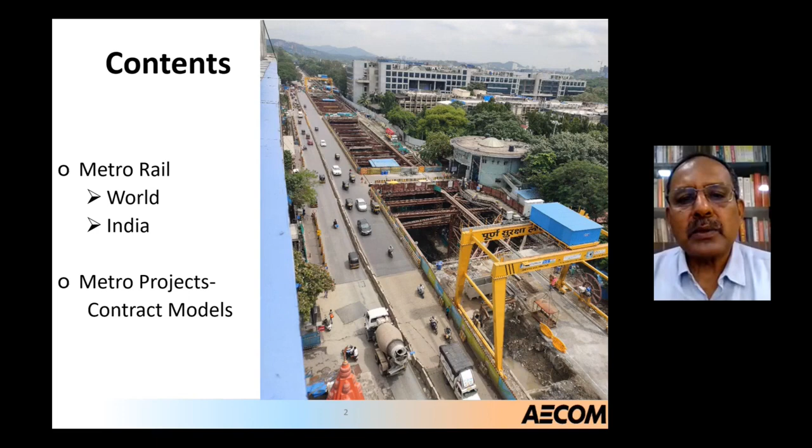So over about 200 cities are enjoying metro rail transport. India joined a bit late, but now it is in full swing. All the tier 1 and tier 2 cities — tier 1 being more than 5 or 6 million population, tier 2 less than that — everywhere it is going on.

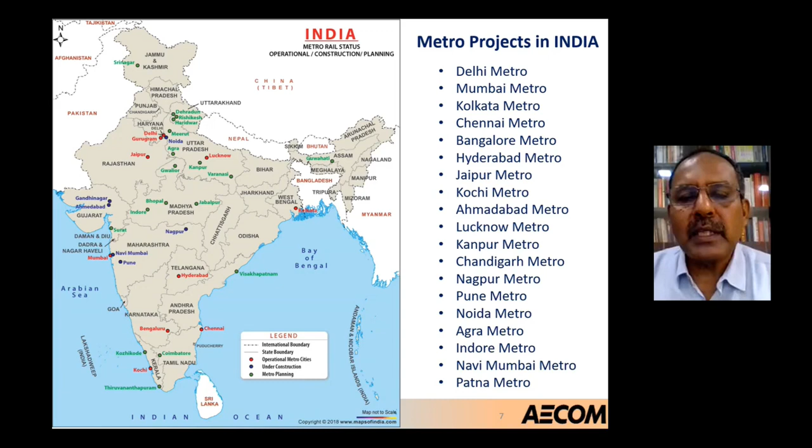Though the construction of metros in India started way back in Calcutta, it only became popular two decades ago when Delhi Metro started. Calcutta, capital of West Bengal, used the conventional cut-and-cover system for the underground metro, both for tunnels and stations, so there were a lot of delays. Delhi started using tunnel technology, TBMs, and so it picked up, and now it is going on in more than 25 cities all over India.

So here is a list. I'm not going to go through every single item, but this is just to give a feel that things are happening in many cities in India now.

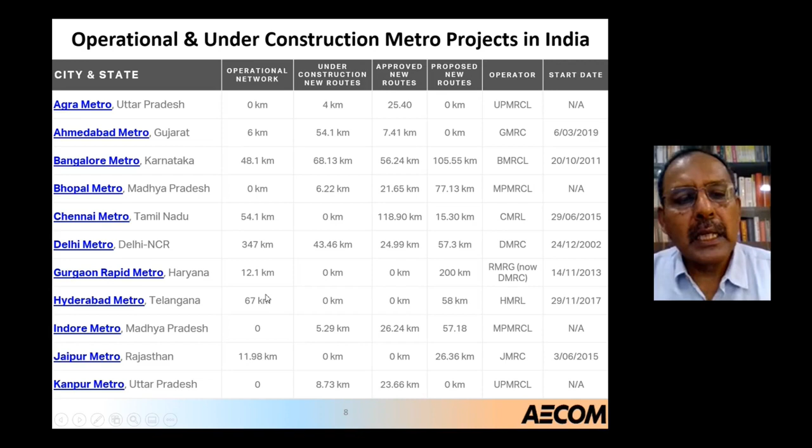So the Delhi Metro, which I was talking about, is now comparable with any other major city in the world. It is more than 347 kilometers of metro, and construction is still going on. I am working for Chennai Metro, the southernmost part of India, and so many other cities. Hyderabad Metro is a unique metro which has run through the PPP model, and other cities are also gearing up.

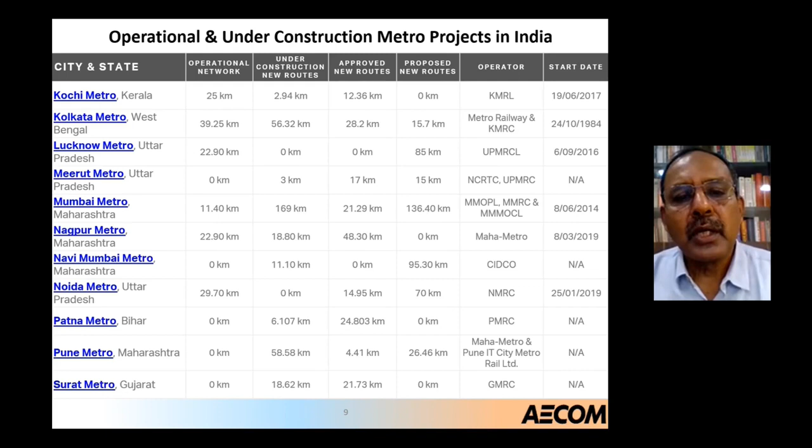So here the list continues. These are either in operation or under construction. The actual length in kilometers which are in operation or under construction are listed here. And these are some of the items which are proposed: Gorakhpur, Kozhikode, Nashik, Trivandrum, and the Metrolite - for people who are not familiar with Metrolite, you might have seen light rail in other parts of the world. It is very similar to that. And a more simplified form, Metro Neo projects, is also there.

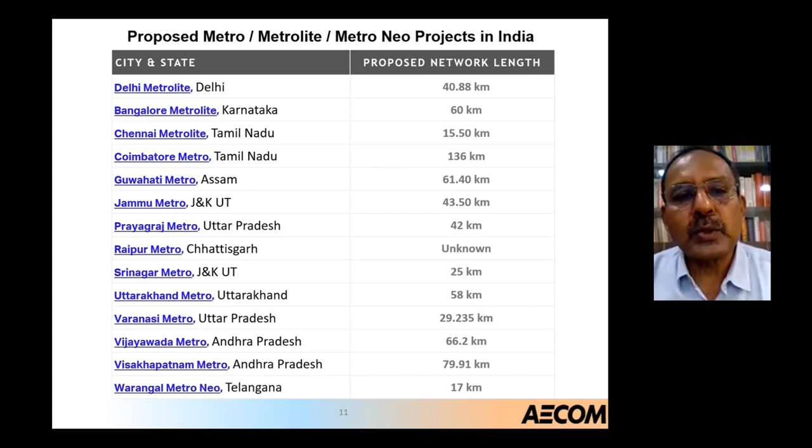Now we come to this, just to have a feel of how India is picking up in the metro rail industry. And today what I want to talk about is the contract models that are used in the metro industry. So the conventional civil engineering works, it all...

The government department, the infrastructure projects, they'll be having a list of contractors, and it is all engineer's design and bill of quantities remeasurement contracts. At the beginning of the job, normally detailed drawings may not be available, but there will be basic drawings with conceptual design and bill of quantities. So it is a remeasurement contract. People are used to that and have been quoting accordingly.

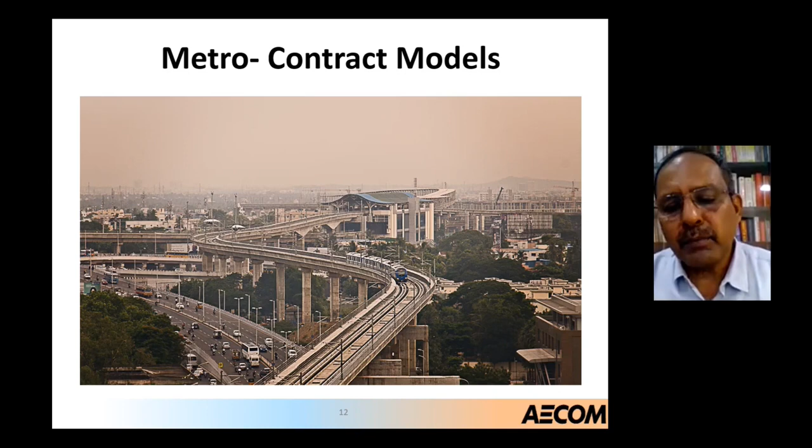But when we entered into this, when the metro industry came in, and funding came from different international banking sources, this system had to be raised up, and different models started coming in.

So we all know that in any civil engineering projects, big projects, there are different stages. It starts with planning and ground investigation, field investigation, and all associated things, and then the conceptual design, and then comes the preliminary design. Some people use the terminology basic design for that. And after that comes the detailed design.

So these are the steps that are required in design. We cannot straight away go for detailed design. Let us go through the conceptual, preliminary stages, and during this there will be a lot of iterations, discussions, brainstorming, and approvals, and then it will be finalized to a detailed design. Once the detailed design is ready, it will make good for construction drawings, and it will go to construction and then operation and maintenance.

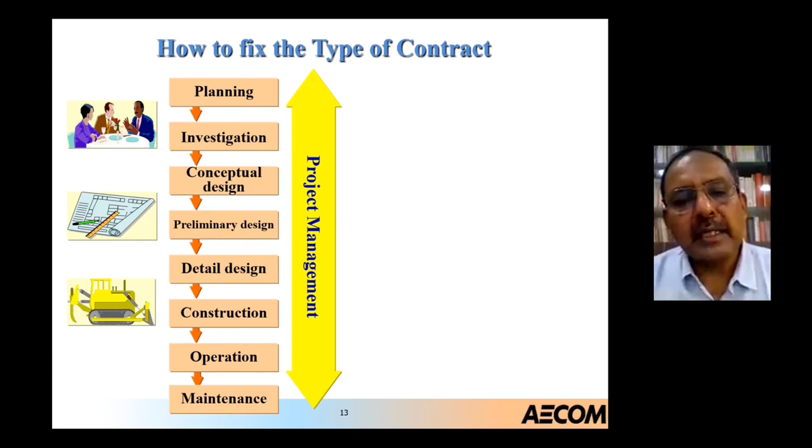So these are the various stages of work, irrespective of the type of contract - these are the items which necessarily have to be followed. We have to go through these stages, and we are going to talk about different types of contract, and these types of contract depend on several factors.

One is the capability of the owner of the project and the chosen contractor, and what are the technical difficulties. The bridge project is different from a tunnel project. A road tunnel is different from a sea tunnel, and it depends on the geology, the type of machineries that are used. So these are the technical difficulties, and there are a lot of uncertainties there technically, and other external factors as well.

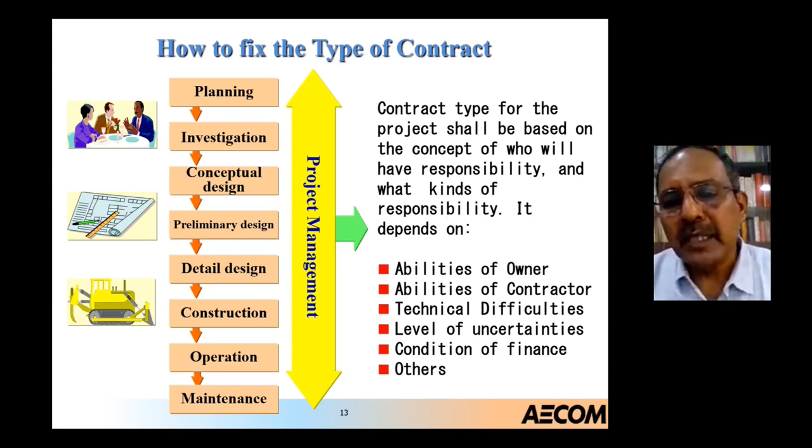And then the finance - where it comes from and what installments it comes in, whether the contractor is provided sufficient advance or has to mobilize his own funds, or advances are provided or loans are provided, and what things are to be provided by the contractor to raise the money, and how these claims are covered - these are all there. So it all depends on all these things - the maturity of the owner, maturity of the industry as a whole - on what type of contract we have to choose.

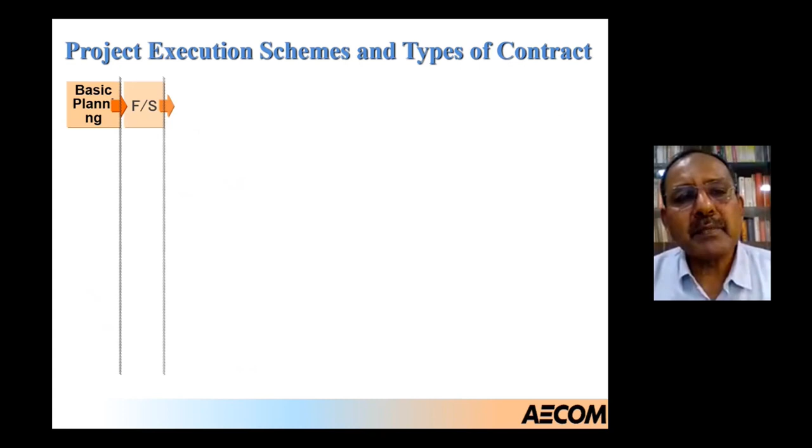So there are several systems. As we said, it starts with basic planning, field investigation, conceptual design, basic design, detailed design, construction, maintenance, operation. These stages are common for any type of project. And in what we call BOT - build, operate, transfer - or design, build, operate contract, it's also called a concession contract, in which the builder or the contractor plays a major role.

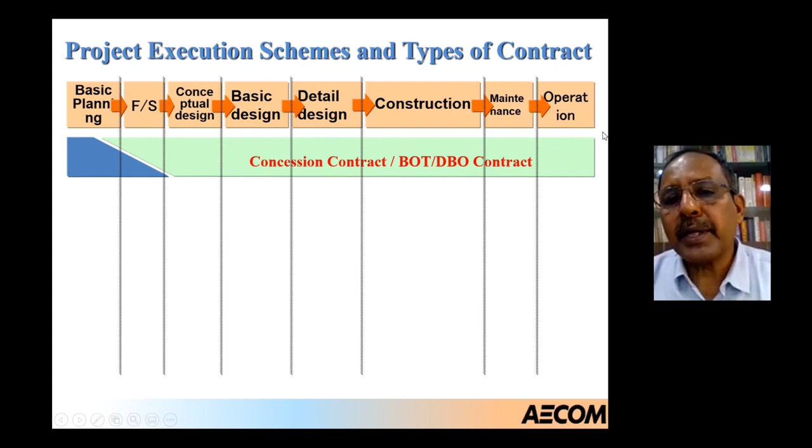As you see here, the basic planning alone is done by the owner, and right from the investigation, from concept design, basic design, detailed design, everything will be with the contractor, and he will also maintain it and operate for a period of time and then transfer to the owner. This is the type of infrastructure project which we hardly use in metros.

In turnkey contracts or EPC contracts, basic planning, field investigation, and part of the conceptual design is all done by the owner. The remaining, right from the part of the conceptual design or from the preliminary design, the contractor takes over. So this is also not very much used, but one example is tried in India, which I will talk about later.

The design and build contract is very popularly used in India about two decades ago when the metro industry started, especially the underground contracts, where there are a lot of uncertainties with respect to ground conditions, because with respect to underground contract, it depends on the capability of the contractor and the type of machineries he is using, the type of geology. It depends on so many things.

What type of tunnel boring machine is going to be used, what type of equipment is going to be employed for building the external wall or diaphragm wall, whether it is a grab or a trench cutter, what type of geology it is, and what is the contractor's capability. If you don't have rock at a high level, what type of shoring system is to be used - it's all mostly lying with the contractor's choice. So the design and build contract was very popular.

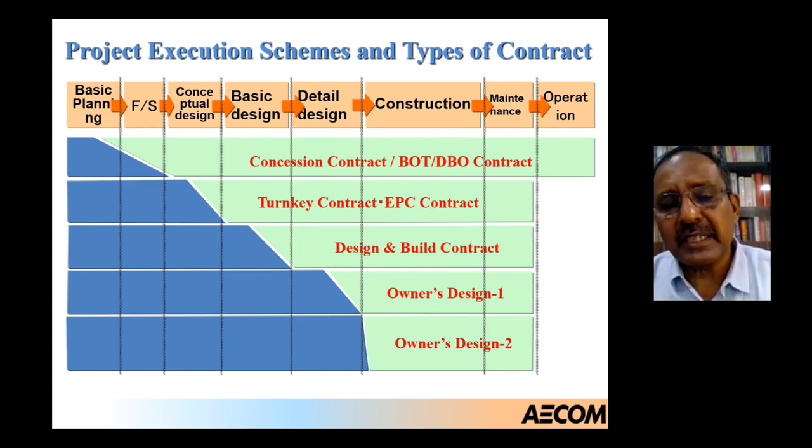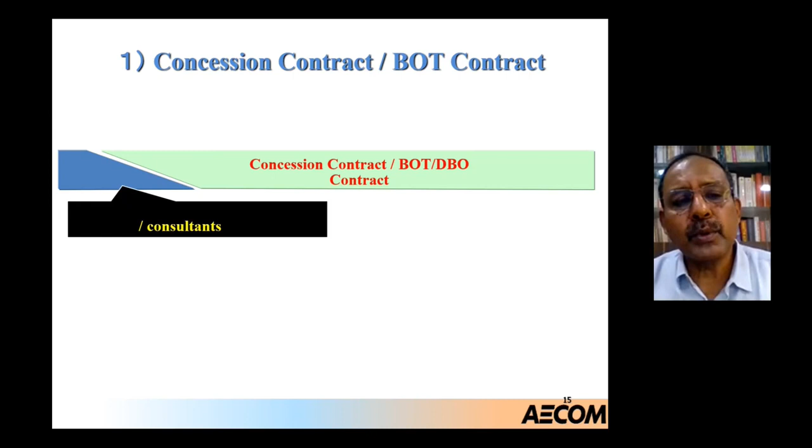So this is all type of contracts, and we talked about the risk. Okay, so now we go one by one. This is BOT contract or DBO contract. As I said, the blue is for the consultants, and the light green is the responsibility of the contractor.

So here the total project management - design, construction, procurement, finance, operation management, everything - will be lying with the contractor. So the contractor has to be a full-fledged organization or a firm which is thoroughly experienced and should have adequate number of technical, non-technical staff to run through the design, run through the construction, and procuring the subcontractors, consultants, and manage the finance, everything.

So normally this is a lump sum contract. You might get some money from the client, but normally in these BOT contracts, the builder will be operating it for some time, like these toll roads. And after a period of time, after collecting the toll for 10 years, 20 years as per the contract, he'll be handing it over back to the owner, and the owner will take over the project.

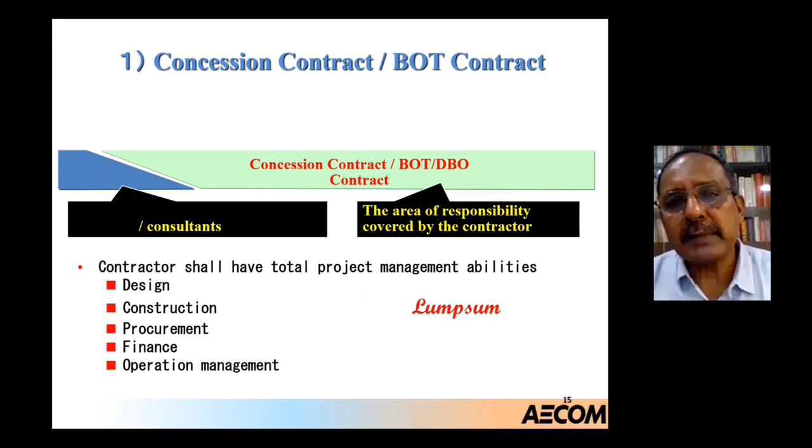So the responsibility with the contracting company is much more in this BOT contract, but not new to the industry. But the metro rail industry is not following this system because it's highly capital intensive, not like building a road bridge and putting some toll gates and collecting tolls. So just for the completeness of infrastructure project types, I have included this. And so these are all the different stages.

So now we go to the second part, that EPC, that is engineering procurement and construction, turnkey contract. So here the owner will be doing part of the design, conceptual design, that is basic planning, investigation, conceptual design. Part of the conceptual design will be the owner's responsibility, but then the contractor will take over. He will complete the conceptual design, take over the complete basic design or preliminary design, entire detailed design, entire construction, maintenance, but operation will be forwarded, given back to the client.

So this model, again, is not very popular in the metro industry due to the capital intensive nature of metro rail projects, but in Hyderabad, this model was used, or what we call PPP. So what the government did, they gave the contractor some government lands. So those lands, along with the construction of metro projects, they also developed those lands, built structures over there. They developed real estate, and the revenue from that, by selling it or leasing it out, was

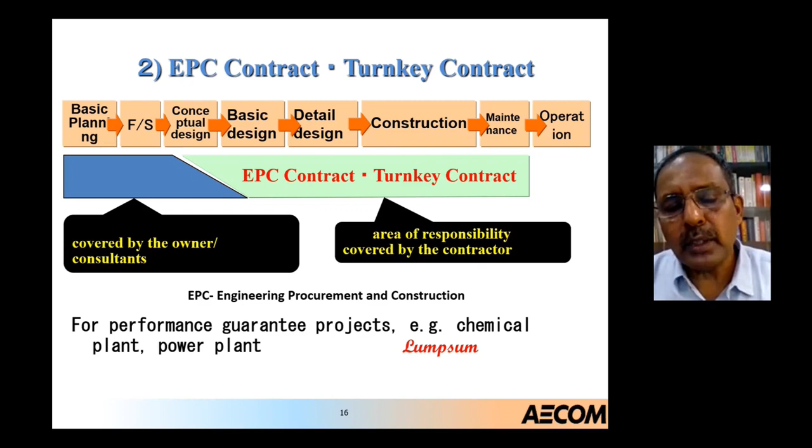taken by the contractor. So there was an arrangement between the owner and the contractor, and he engaged his own designers and his own subcontractors. So except for the operation part, starting from half of the conceptual design, this is done. But in civil engineering industry, it is only in chemical plants, power plants, those type of industries where it is used. For one time, it has been used in India, in Hyderabad, and the project is running very well, but it's not a very popular model, owing to a lot of financial responsibilities and constraints.

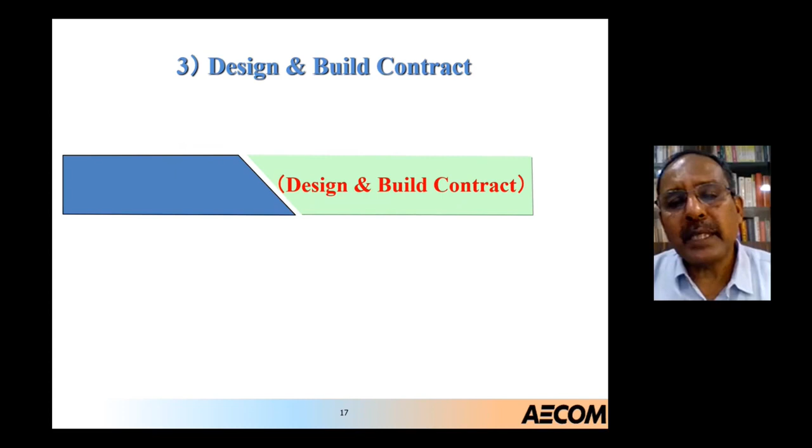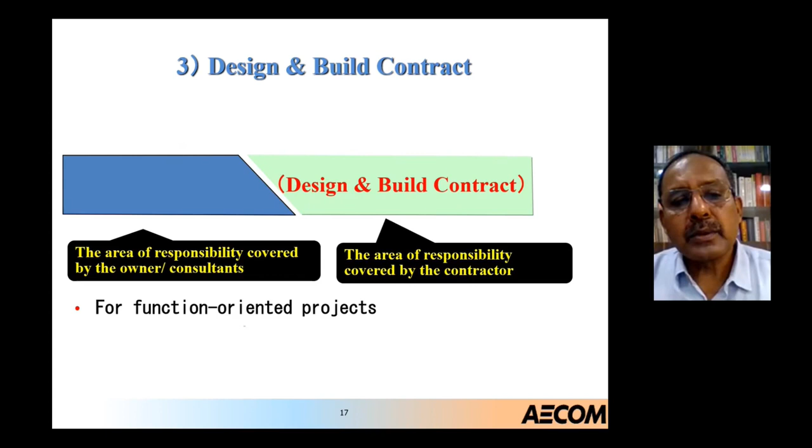So this is a very popular model, design and build. That is, the contractor will do the detailed design, and he will also do the construction and part of the preliminary design as well. So as I said before, underground metros are using this. So basic planning, conceptual design, and a small portion of preliminary design is also done by the builder. But nowadays, the entire basic design is also done by the owner or owner's consultant. So the detailed design, construction and maintenance will be by the contractor. So this model is a bit time tested, but there are a lot of risk elements here.

What is that risk element? There are a lot of uncertainties with respect to the ground conditions and the type of machineries to be chosen.

This is because if you're going down by 20 meters, unless you know the soil conditions and geology very clearly, you cannot choose what type of external wall or shoring system you are going to adopt. In places like Chennai, where the groundwater table is very high, we normally go for diaphragm wall. But if the rock levels are higher and the diaphragm wall has to pierce through the rock, the normal grab is not suitable, and we have to go for expensive trench cutters. So this type of equipment matters.

So in design and build, these are some of the uncertainties. Whatever is predicted by the client, if it's not adequate enough or if it deviates on site, this leads to a lot of claims. So unresolved claims go to arbitration and court. These are the types of difficulties.

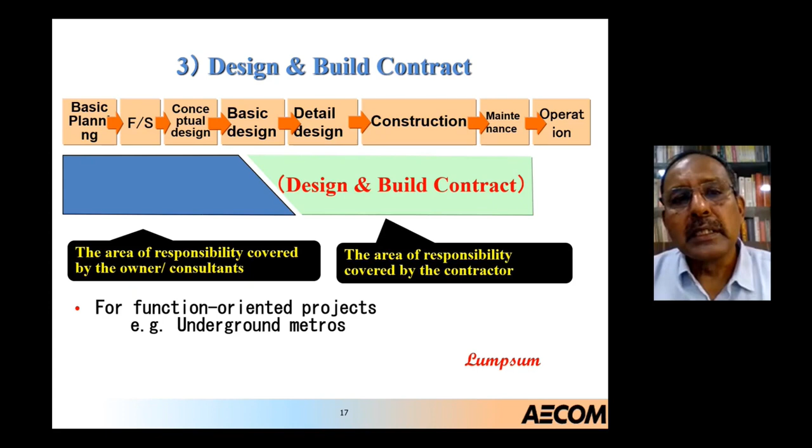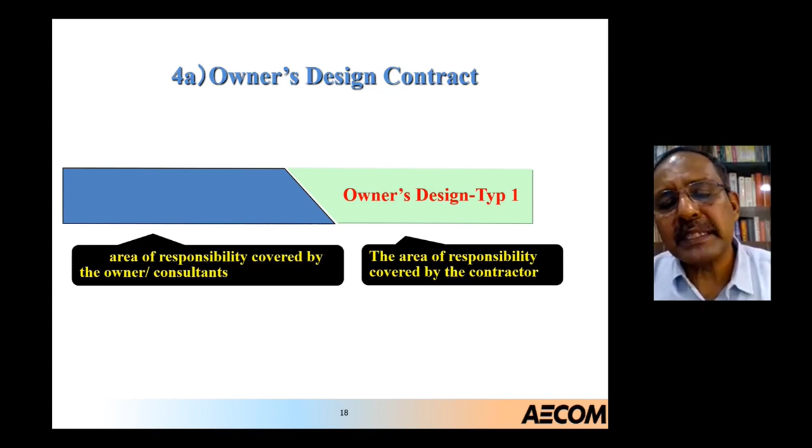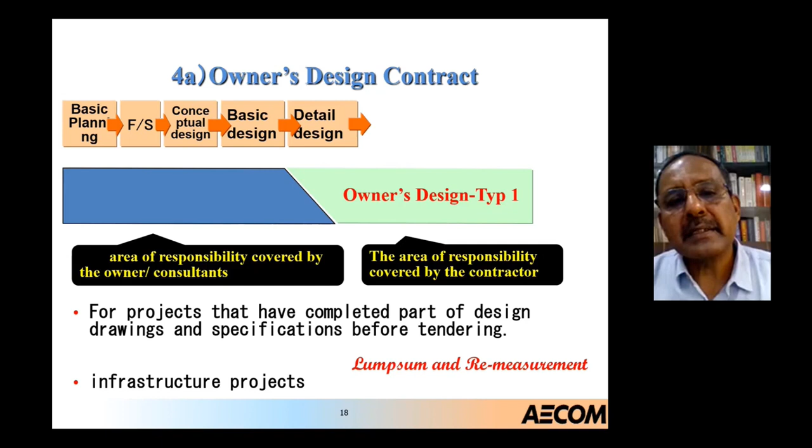So now we go to the second model - the owner's design contract, type 1. This is being used in many cities in India because after going through design and build and learning the industry for over 2 decades, many metro companies or government-run or quasi-government companies go for the hybrid model. Part of the design will be done by the owner before starting - basic design and detailed design, some by the owner before commencement and some by the contractor.

So here, as I said before, for underground stations the tunneling and underground civil and structural engineering detailed design will be given to the contractor, and the remaining architectural and MEP design will be done by the owner's consultant. That's how it's divided. This can again be lump sum and remeasurement - the pattern used is that the owner's design, where complete drawings are given, will be remeasurement, and the contractor's design part will be lump sum.

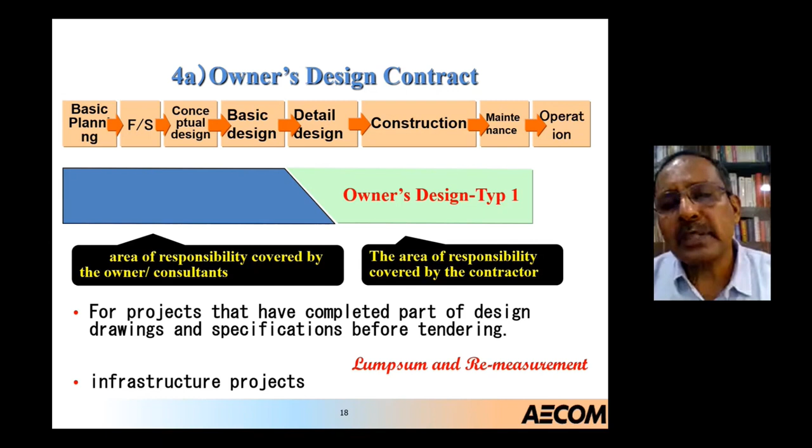Again, that element has overlapping risk, which can only be overcome by good homework before the commencement of the project and a matured industry, as I said.

So this is the owner's design contract, which I call, for convenience, type 2. Here the entire detailed design is done by the owner's consultant, and the contractor only has a build-only contract. Here again there can be 2 models.

But in case of underground, there are a lot of elements. If it's purely elevated, we all know the industry, especially the Indian industry, for the last 70-80 years has been building bridges - not metro rail bridges, but any type of bridge, precast or pre-stressed, long span. All bridges are very familiar to infrastructure contractors; they've been doing that for quite some time. But underground experience is relatively less.

So initially, expatriate experts were hired, but now the industry has grown, though underground uncertainties are still there. I've been with AECOM, the company I am working for - we were the detailed design consultants for one of the 3 corridors of this underground metro.

We completely did the ground investigation for the station, tunnels, everything in very close proximity, also for driven sections. We ascertained the ground conditions, and accordingly fixed what type of permanent works and what types of temporary works needed to be done.

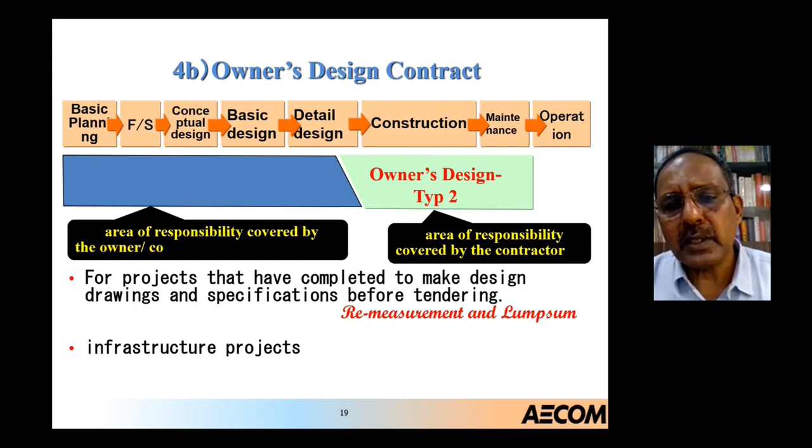International contractors are very familiar with this owner's design contract lump sum model. But for local contractors, we had some road shows and pre-bid meetings, explained what is expected, and there were no issues. People understood very fine, and the quotes came in.

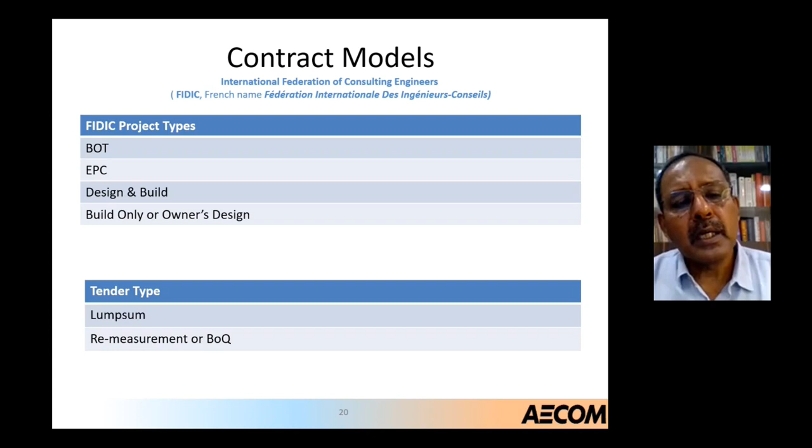We're all very familiar with the FIDIC conditions, so I'm going to run through this quickly before ending my presentation. What are the types of FIDIC models being used? We talked about BOT—build, operate, transfer—EPC—engineering, procurement and construction—and the third one is design and build. The last one is build-only contract, or owner's design contract, both are the same. Tender types can be either lump sum or remeasurement, both have advantages and disadvantages depending on what type we're using. Generally, BOT, EPC, design and build are lump sum, and build-only can be both lump sum and remeasurement.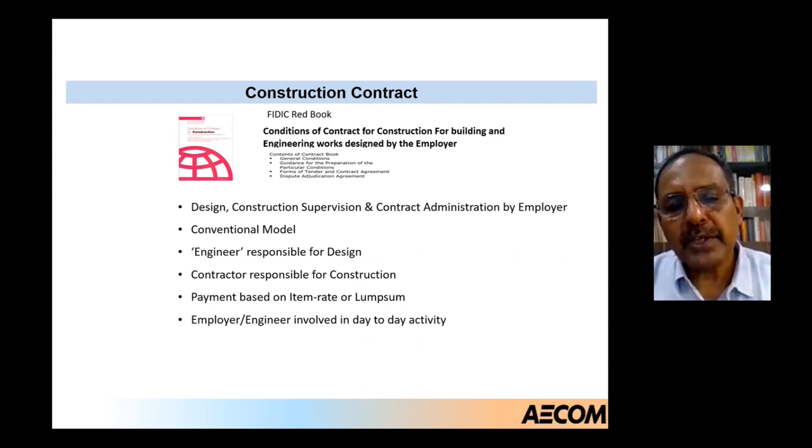Of course, design is done by another hand of the employer, so it is mainly the engineer's job to see that the construction is done according to the design, and if there is any variation, he has to manage it and see that the project goes on fine.

So these are the different types of models which are being used in India and other parts of the world. And I thank Rail Analysis for this wonderful opportunity to share my experience in this forum. Thank you very much.